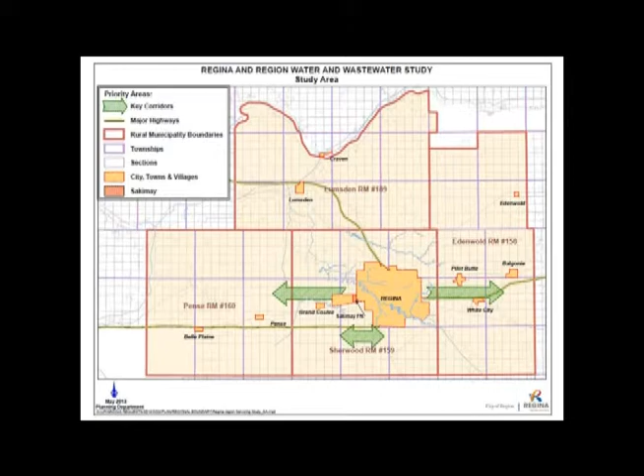So, the summary, these are the 2 slides. This is the first slide. There's high growth projections for most of the stakeholders in the region. And there's some very strong plans for growth in terms of what's happening, and that's why things like this summit are happening, to try and address those.

Strong relationships were built through this study. There was a lot of trust and openness that improved. People were coming to the table with their problems. At the start, it was a challenge in terms of getting people to open up and put their cards on the table in terms of where they're at with their water and wastewater systems. But by the end of it, it was a very open environment, and we were having some real productive discussions in terms of what things are happening.

It's important to note here that there are already a number of regional relationships happening. This isn't the start of it. Buffalo Pound Water Treatment Plant is a good example. Pilot Butte and Balgonie already have a water line that they're sharing water through. Bruce mentioned the White City and the RM of Edenwold Wastewater Treatment Authority that's going on, and they're helping each other there already. So this is already happening. This study was basically a way of giving a wider view across the region rather than just peer-to-peer. Is there a bigger regional solution that we can look to?

So water. In the short term, there's no major water problems. There's going to be a challenge as things start to grow, but in the immediate term, it's not the big headache. Water infrastructure is generally in fair to good status in the region. Buffalo Pound provides a good, reliable source of water, and there's an abundant raw water supply there. Growth in the existing east communities is going to start to constrain the Zehner aquifer. So at the moment, it's all groundwater that's coming through, and those communities are going to start to be faced with challenges using that aquifer as the growth starts to get higher.

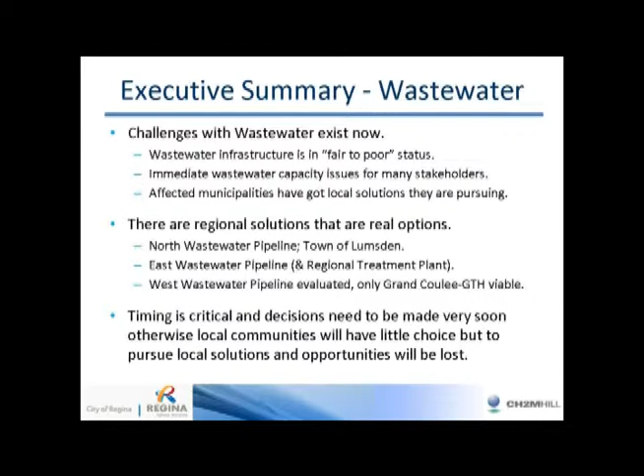So wastewater in a little bit more detail. In the West, when we started this project, the stakeholders came to us with their growth projections and their population projections, but given the course of the project and as we were talking about some of the infrastructure challenges, population forecasts and projections were changed.

So the West was one example where we started to talk about the infrastructure that would be required to support bigger communities, and population caps and forecasts were changed slightly, which basically meant that for a full regional solution, there wasn't the population body to support it. You could obviously build a pipeline, but it's going to be very expensive, and local options were better value for money for them. The exception there being, because of Grand Coulee's very close proximity to the GTH, there could be a connection in there to the system. So that was something that was looked at in the West.

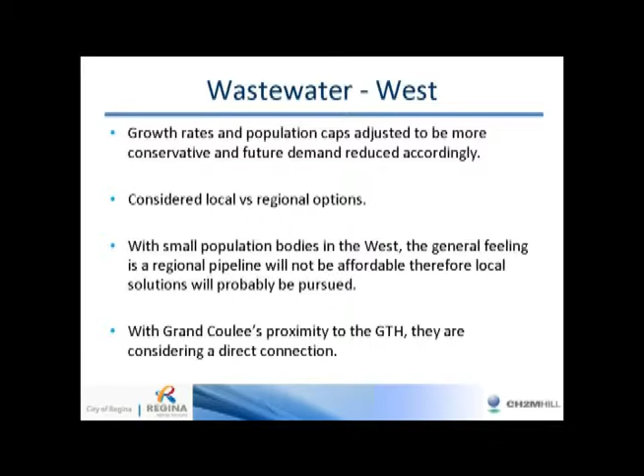In the North, Craven, there's no immediate concerns for wastewater. Things are in good shape, and they have capacity for the growth that they want to do. Lumsden, there are current problems right now, a lack of treatment capacity. They're looking at a local facility. They've done some existing pre-design work on that, but they're also in discussions with Regina about this regional pipeline that could go in place.

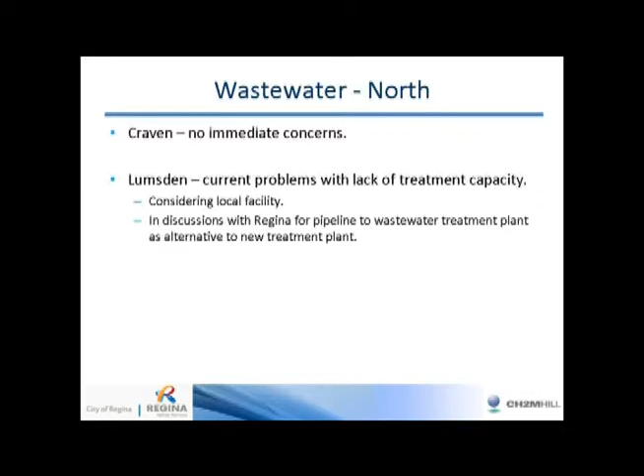The east. This is where it gets a bit more challenging. There are capacity concerns with all the stakeholders in the east, including the city of Regina. Local options would include a local wastewater treatment plant for White City and Emerald Park. Local lagoon upgrades would need to be put in place at Balgonie and Pilot Butte to handle their growth. And there'd be a number of city conveyance upgrades that need to get done. There's a lot of city growth happening in the southeast of the city, so there needs to be some conveyance upgrades to manage that. So that's the local options.

Regionally, what we looked at was a regional pipeline, and I've got a slide that explains that in a bit more detail. Key points about both of these regional solutions: it needs everybody on board. If some of the stakeholders aren't bought into this, it's not going to work. It's not going to be viable as an option. It needs everyone in it together, otherwise it's going to be more cost prohibitive. With the pipeline, you can add a regional wastewater treatment plant in the future if it's required. If growth doesn't go the way you think it's going, the East Regional Treatment Plant wouldn't necessarily need to happen, but if growth is going to happen, then you do need something out in the east that can process the wastewater. We looked at the wastewater treatment plant.

Again, everyone needs to be on board. It could be led by a regional board, and as was highlighted by the White Butte group, they were already in discussions about a regional wastewater authority to manage that. So it's not saying that the regional treatment plant would be operated by any one of the stakeholders. It can be done collectively, like as is done in Buffalo Pound, or there's a number of other regional models that could be employed. And also the pipeline wouldn't solve Regina's challenges in the southeast, so looking at an East Regional Treatment Plant would ease the city conveyance challenges.

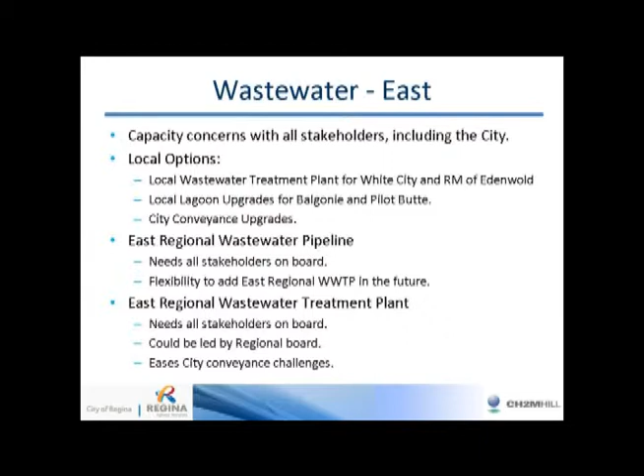So, City of Regina in a little bit more detail. There's currently servicing issues for the city, which are exacerbated by the growth projections, and that's particularly in the southeast where a lot of the growth is happening. The city is going to need to do something significant to address these issues, and that's what part of this is about, understanding what the options are. For the city, there's three major options that they can look at. The first one is conveyance upgrades through the city, upgrading the pipes that are already in place to get it from the southeast up into the existing treatment plant in the west. The other option would be to construct a big bypass, just a big pipe all the way around.

That's another option to look at. Or the other one would be buying into an East Regional Treatment Plant. So instead of shipping all the waste from the southeast up to the west, could we just treat it in the east? That's it, massively oversimplified. It's extremely complicated when you get into it, and further analysis is needed. But that's the crux of it right there.

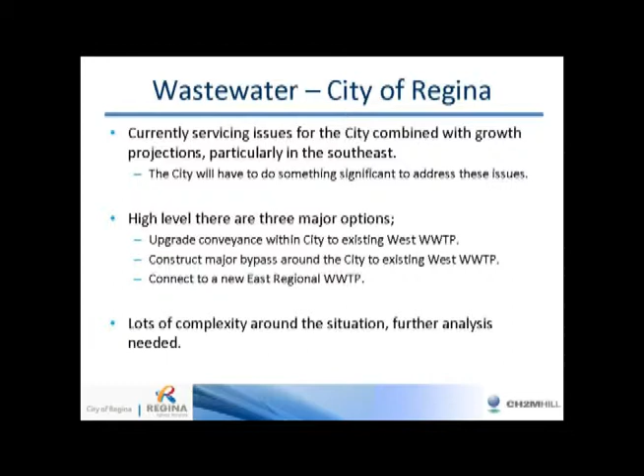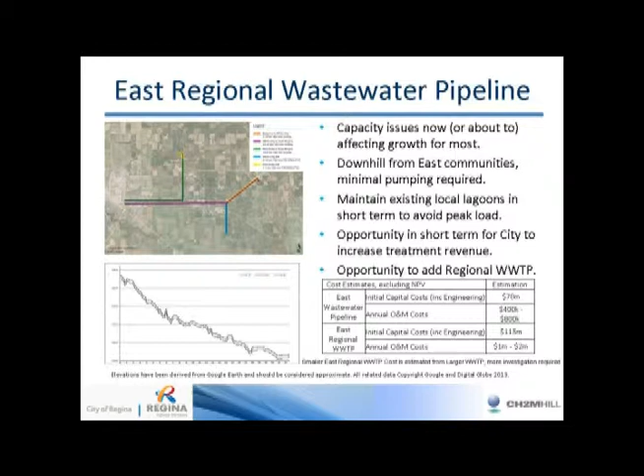Next slide gets into some of the costs. In addition to the engineering design of what the systems could look like, we costed it up - we found appropriate costs for what it could look like, useful for your budgeting and planning discussions this week. This example is the combined east solution, both an east wastewater pipeline and an east regional wastewater treatment plant, and this is how the costs divvy up across the region.

As I said, the wastewater treatment plant can be built in the longer term. You'll see some of these numbers look big, but bear in mind this is the cost of both a pipeline and a treatment plant. In the short term, you're looking at just the pipeline cost, and in the longer term the wastewater treatment plant cost - that gives you time to work out the funding mechanisms. As was mentioned by Metro Vancouver, collectively you have a lot more power to go and get funding for a bigger regional project, whether from the province or the feds. There's money out there for innovative, collaborative approaches like this.

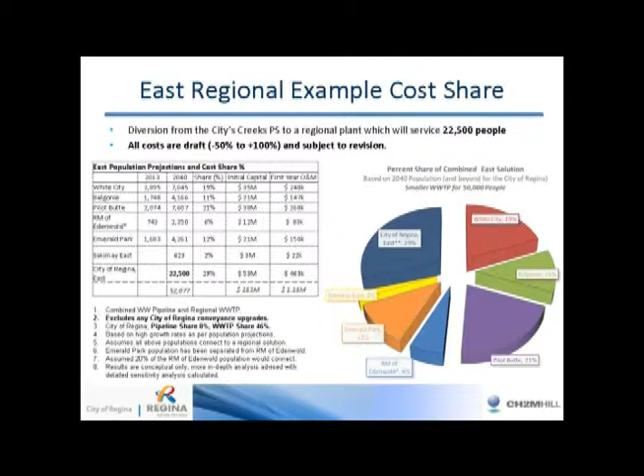So to summarize, wastewater in the region — north and east have got immediate challenges. There's existing infrastructure that's reaching its hydraulic capacities. Development's currently on hold for a lot of the stakeholders, and it's really having an impact on your communities right now. There's high growth projections, and that's going to need some big infrastructure.

We went through numerous options. That report is available publicly — it's on the Regina website, and it'll be on the Summit website as well, so you can look through that in some more detail. But basically, we need to decide: on a north and an east region, are we doing this locally, or are we doing this together? That's something that needs to be discussed this week.

In the west, as I said, there's going to be challenges in the coming years. Small population bodies mean a full regional pipeline isn't necessarily viable, but there's a connection with the GTH to be considered.

Given the projected growth, we were looking at longer term solutions. With wastewater, it's very difficult to do a kind of small band-aid. We just looked at what the end solution is and then looked at interim solutions that might be required to take people over — temporary package treatment plants, like the one White City are looking at for a 10-year period, were discussed as well.

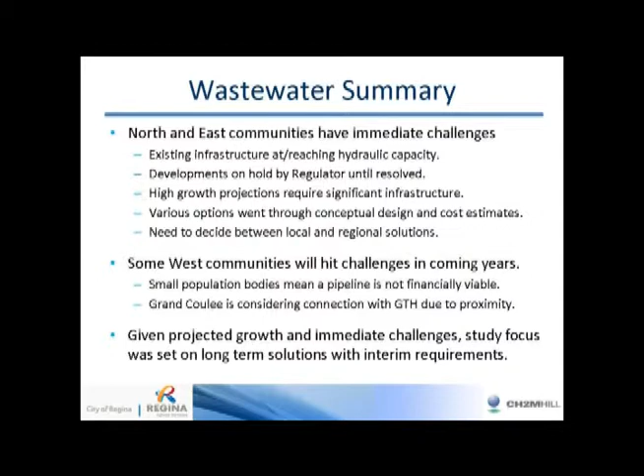So from wastewater onto water.

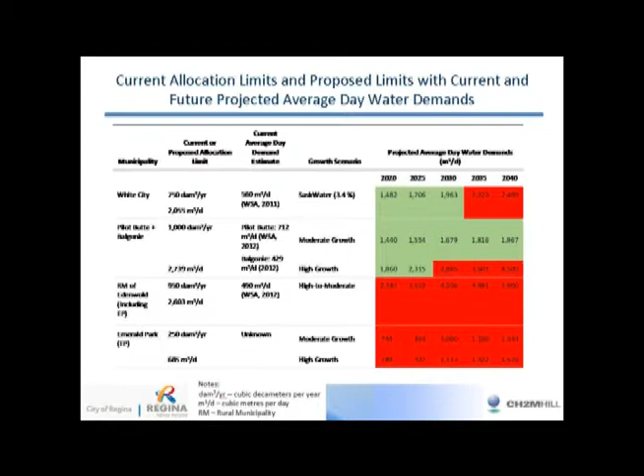West and north, in terms of a water summary: in the west, the water's coming from Buffalo Pound. There's the regional pipeline that comes through from the treatment plant, and there's connection lines off those pipelines. As I said at the start, Buffalo Pound provides a reliable water source, and there's an ample raw water supply.

In the north, Craven's water allocation is sufficient for their growth projections well into the future. And Lumsden have done a lot of work to manage their aquifer — Lumsden are on a different aquifer to the east, so they've done a lot of work in terms of what's there and what's stable to support their growth.

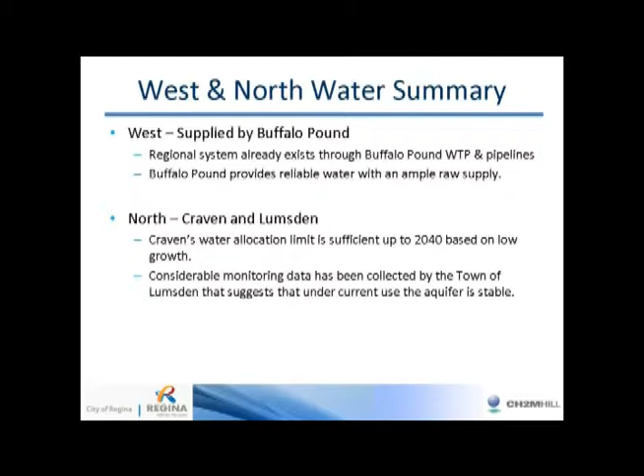Aquifer limits are very hard to manage and predict. You don't know how the aquifer is going to react until you start pulling water out of it. But for the purposes of your planning discussions, this is the state of play as it's understood right now by the Water Security Agency. There's more work scheduled to be done in terms of more testing, but this is where it looks like.

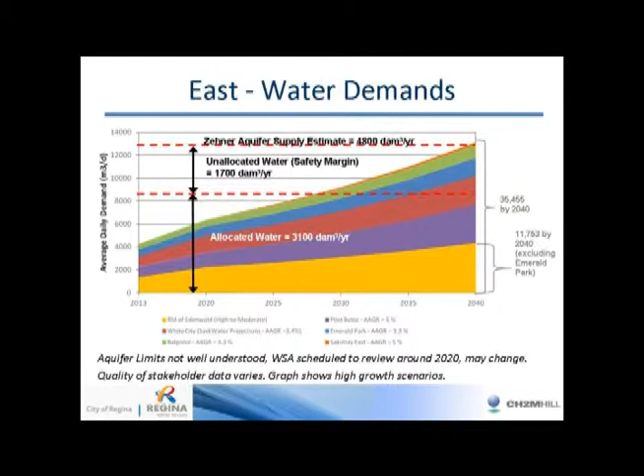A quick summary of the east: there's high growth scenarios as before. The Zehner aquifer, as you saw in that previous graph, has been allocated to the existing users, so that doesn't include the new communities that would be developed in the RM of Sherwood or the RM of Edenwald. That's going to present another challenge for the aquifer base.

Based on the current projections of those current communities, we're going to be hitting the aquifer limits around 2030. The RM of Edenwald, with their growth, their particular limits are going to be hit sooner, but that's something that can be dealt with in terms of managing those allocations and talking with the Water Security Agency.

There's going to be moderate infrastructure upgrades required for the local infrastructure in the next 10 to 20 years. So could we look at a regional solution and time that regional solution so that those local upgrades wouldn't necessarily be required, or could be minimized to save money for the municipalities?

And as I said at the start, water conservation could buy time. It can extend that limit in terms of how much water we need, and 2030 could move to 2035, 2040, and it also eases pressure on the wastewater.

It's worth saying that although you've got some time with the water, now's the time to be thinking about it. We can focus on wastewater for the next couple of years and get a plan in place for that, but don't forget about the water—that will need to be dealt with as well.

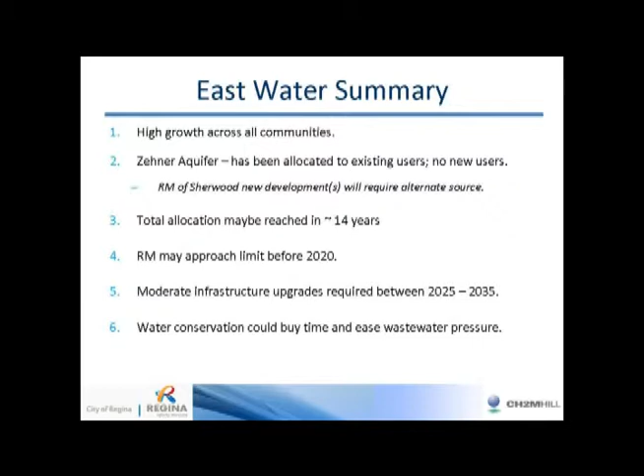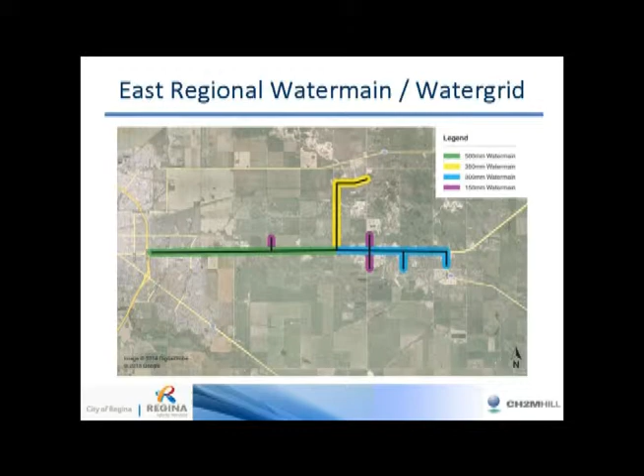There's a lot of information in there, and it's set some good options and good directions for going forward. But there really is a lot more work that needs to be done, and from a wastewater perspective, it needs to be done pretty quickly. Timing is critical, and decisions are going to need to be made very soon—otherwise people are going to be forced into choosing decisions regardless of other options.

In terms of what you need to look at doing, you should be thinking about allocating money for phase two within your budgets. I know that's something that's going to come up in the discussions either this afternoon or tomorrow, and developing your action plans. That's really what this study's about, in terms of the summit and how you're going to move forward.